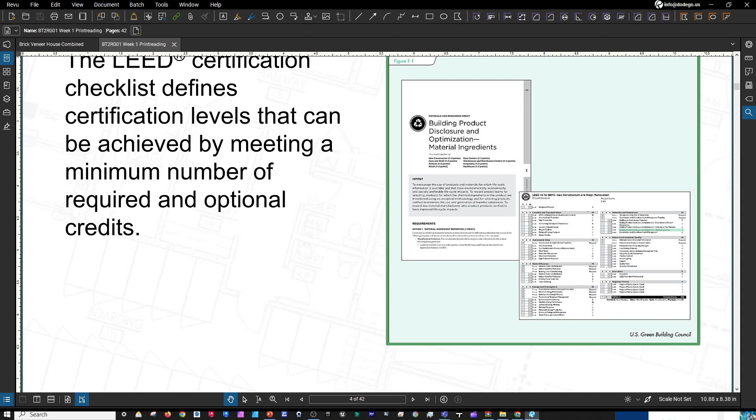Now, speaking more about the prints, while some electrostatic prints are still produced today, as you see, the majority of construction drawings are produced from digital files using wide format LED or laser and inkjet printers. Now, these wide format digital printers sometimes are referred to as plotters, and they use light emitting diodes, or LEDs, as we all know them.

Also, lasers or inkjets to produce those clear and accurate construction documents quickly and cleanly, as opposed to historically, when everything was done by hand on a drafting table.

Now, Jimmy, something to add?

No. So now with the click of a button, you can print off multitudes of sheets in one project quicker, easier, faster. So that's an advantage of these digital prints that we have nowadays. But we may have lost some degree of artistic expression. If anyone's ever seen old architectural drawings, 1800s, 1900s, especially if you go to a museum in Chicago, they still hold a lot of these prints for artistic viewing, and they're simply beautiful. So if you haven't done so, I very much recommend it.

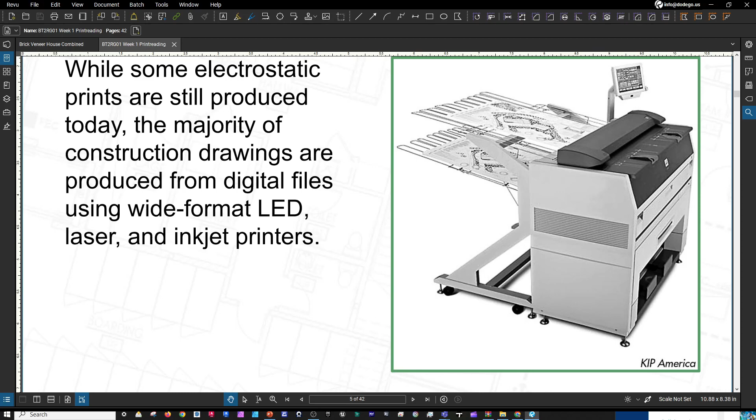But again, our digital frontier is what we're on, and printing LED style prints is very much the thing of the day. Okay. Coupled with that, we have computer aided design. And that computer aided design is also known as CAD, also known as computer aided drafting or computer aided drafting and design. And this utilizes computers to produce architectural drawings.

And CAD systems are common in architectural and engineering firms because of their efficiency and the quality of drawings that are produced. Now, architects benefit from increased drafting productivity achieved in the planning, the design, the drafting, and the reproduction of those prints. And CAD generated prints provide consistent line work, consistent symbol representation, and probably most importantly, consistent lettering.

And you can see that here in this example provided to us by Rodger A. Brooks Architect, showing us a section on the left-hand side, on the top right, an exterior elevation, and at the bottom, a detail. All right. Main takeaway is that CAD generated prints are going to provide consistent line work, consistent symbol representation, and consistent lettering.

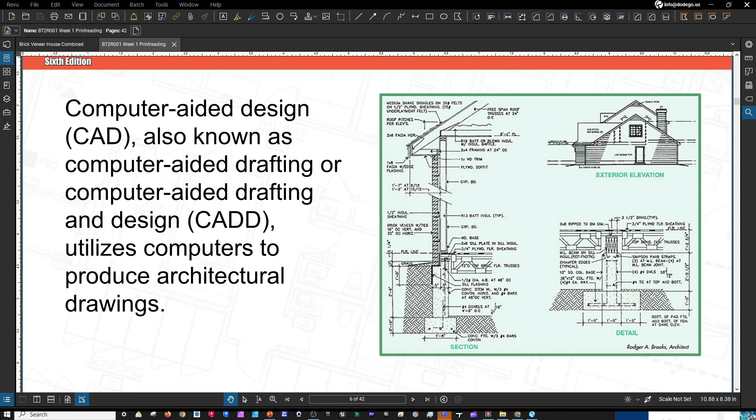Which leads us into a more sophisticated form of CAD: BIM modeling, right? So CAD systems are going to offer many advantages for architects when developing their drawings, including consistency, which I emphasize. And that consistency can encompass uniform line width, symbol depiction, and representation of drawing components. It also includes an advantage of changeability. So revisions or any additions or deletions are easily made to that electronic file.

CAD systems also provide an advantage in layering. That's a method similar to using overlays on conventional drawings, in which trade specific information is added to a base drawing to generate trade specific drawings such as mechanical plans, electrical plans, and plumbing. Another advantage is modeling. So, viewing a building in pictorial form and subjecting that model to engineering tests, such as a stress test, which you will typically see in a structural application, can also be a major advantage.

Another advantage is storage. Drawings stored on electronic media, such as a compact disc or a flash drive, consume less physical storage space than paper drawings. Another advantage is duplication. So you can have an unlimited number of prints, and those may be reproduced, each with original quality. Lastly, another big advantage is information management. Information about the materials used in drawings can be stored and updated as drawings are generated and changed, allowing the drafter to extract that information for takeoff purposes.

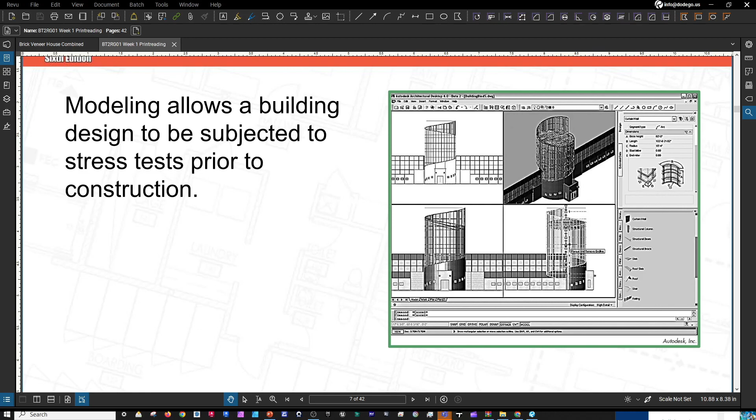More important, what we see now is BIM. And we have an example given to us here by Vico Software Incorporated. BIM, if anyone hasn't heard of it, is short for Building Information Modeling. Building Information Modeling is an integrated electronically managed system that aligns all working drawings, including your structural drawings and your shop drawings, in a consistent system. Building Information Modeling, also known as Virtual Design and Construction or VDC, allows for integration of CAD generated documents or building models from various sources to create a complete set of construction documents.

And contractors, your subcontractors, and your suppliers can all import the electronically produced construction documents or models into a common system that recognizes all of the individual construction components in a fully integrated platform. And now prints are generated from the integrated model that takes all construction components into account. BIM technology also allows for integration of estimating and scheduling software, which are very important on the construction side, very much impacting the economics of any type of architecture. Okay, and that's BIM, short for Building Information Modeling. Any questions before we continue?

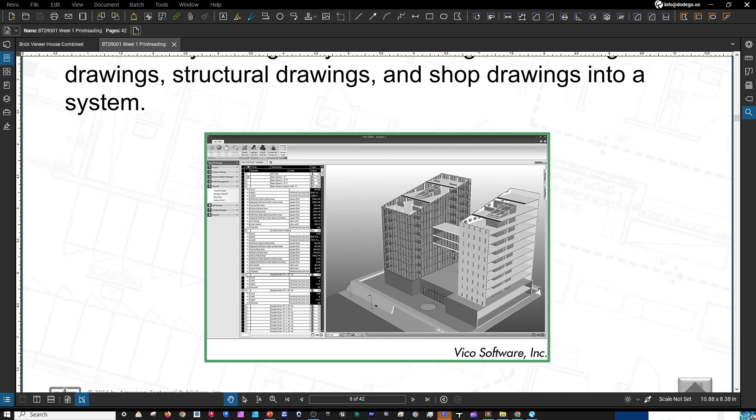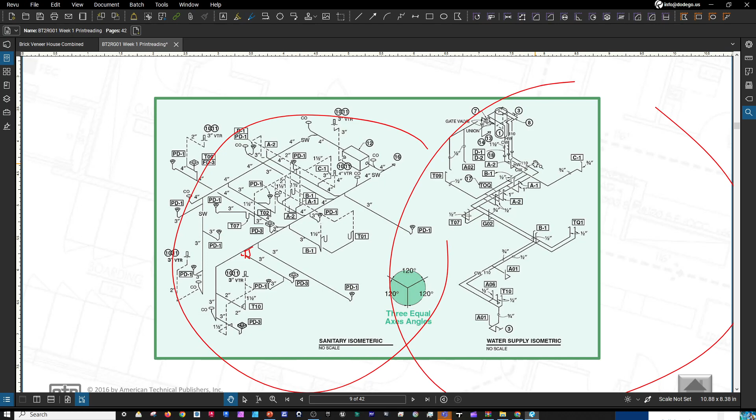Next, isometric drawings. Now, this is going to be a drawing in which you're going to have three principal axes. They're going to be 120 degrees apart. Let me see it here. Three principal axes. Here, all at 120 degrees apart. These are isometric drawings. One dealing with sanitary, one dealing with water supply, but they both are isometric.

So since the principal axes are at an angle, those three principal faces are going to be skewed. However, isometric drawings provide a realistic looking view of the object. And isometric drawings are commonly used for piping diagrams to depict the arrangement of piping in a building. But your main takeaway is that an isometric drawing is an axonometric drawing in which the three principal axes are 120 degrees apart.

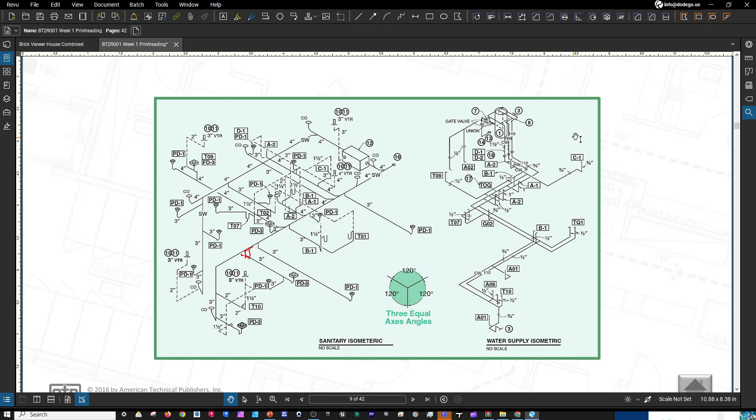Next, perspective drawings. Perspective drawings are the most realistic type of pictorial drawing. A perspective drawing is a pictorial drawing showing an object as it appears when viewed from a given point. They are commonly used as artists' renderings of a proposed building. The rendering allows a potential owner to visualize the overall appearance of the completed building and may be used for presentations to various zoning boards.

These are your money shots. These attract and create appeal to any potential project that is wanting to be built. Okay? Perspective drawings.

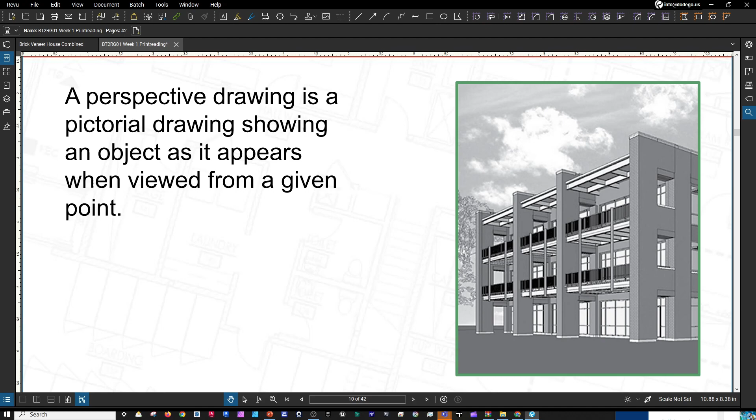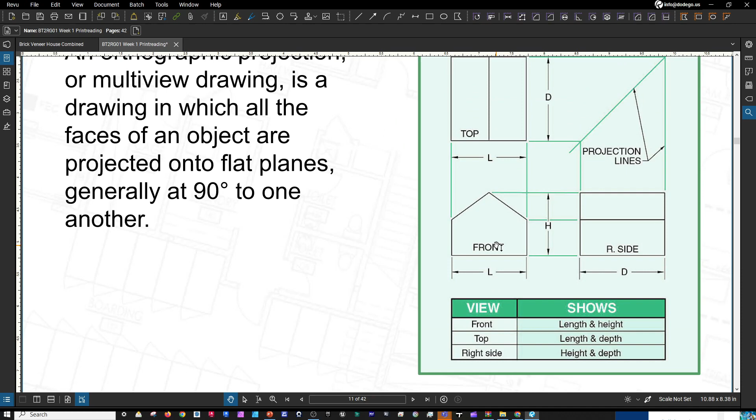Another type of projection is orthographic. An orthographic projection or multi-view drawing is a drawing in which all of the faces of an object are projected onto flat planes, generally at 90 degrees to one another. This is different from what we saw in the isometric, where they're at 120 degrees. The front, the top, and the right side views are most commonly shown.

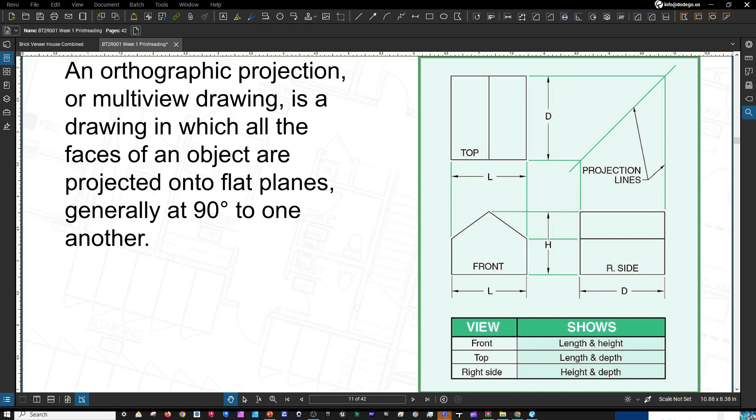The top view is always directly above the front view. And the right side view is always directly to the right of the front view, as you see here. So in orthographic projections, each view is shown two-dimensionally. Here, the front view is showing the length and height of our building. The top view is showing the length and the depth. And the right side is showing our height and our depth. Any questions on these? All right.

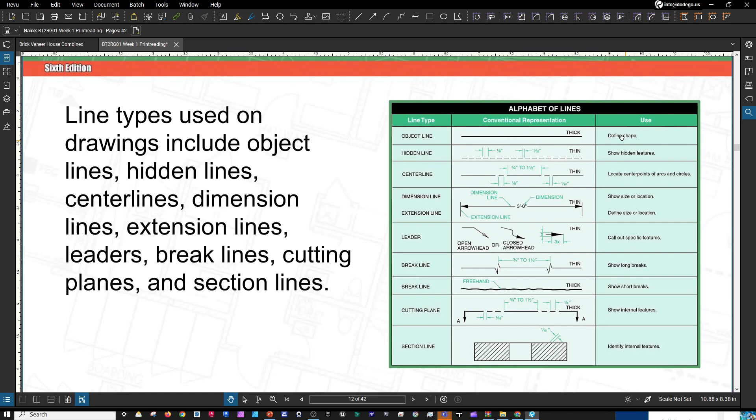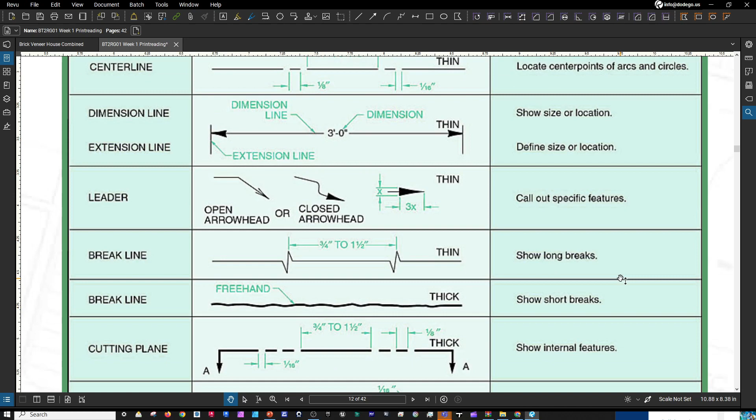Line types. Line types used on drawings include your object lines. We're going to zoom in here. Your object line, hidden lines. We also have center lines, dimension lines, extension lines, leaders, break lines, cutting planes, and section lines.

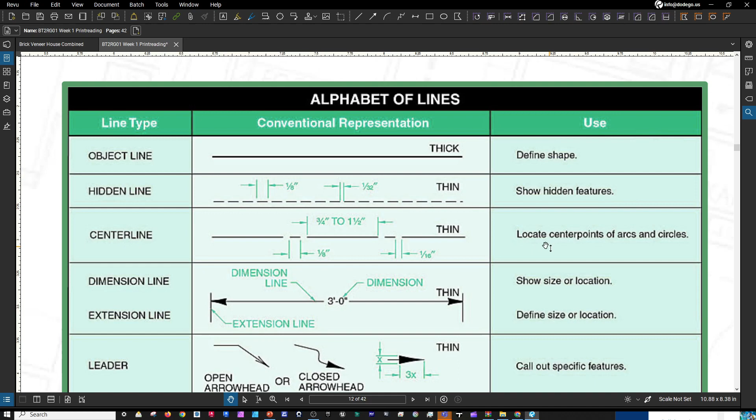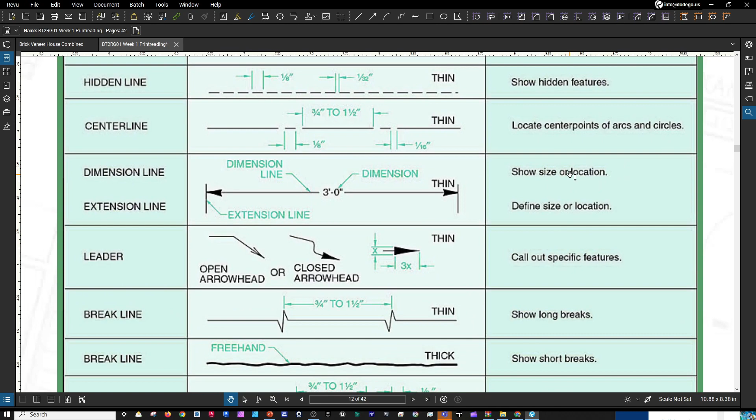Your object line is going to be more thick and heavy in appearance. These are typically used to define the shape of an object. Hidden lines are used to show hidden features, which we'll see heavily used in elevations, sections, or details. Your center line is used to locate the center points of arcs and circles. Dimension lines are used to show size or the location of objects. Your extension lines define the size and also the location, but in a more particular manner.

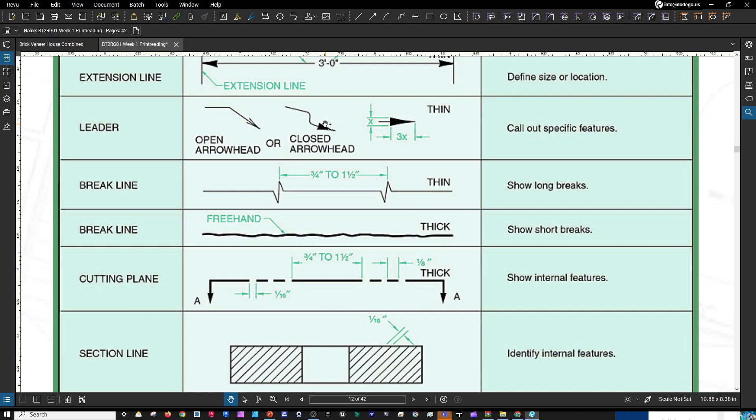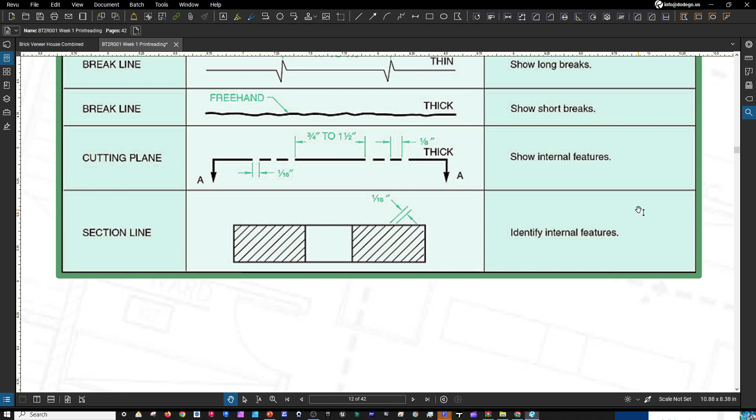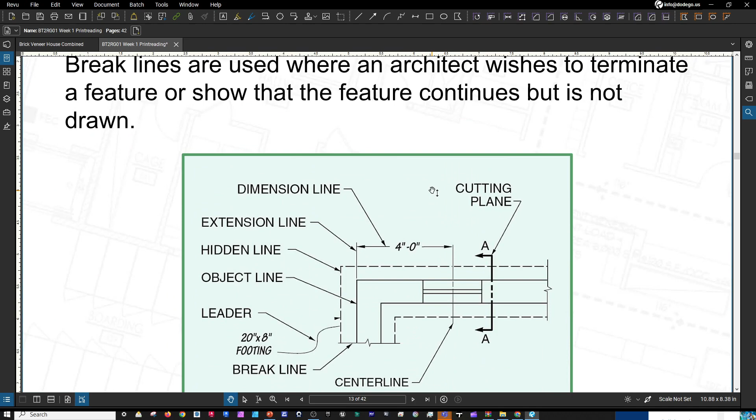As you see here, we have our dimension of 3 feet. Our dimension line is thin, and the vertical part is the extension line. Leaders are used for calling out specific features. Break lines show long breaks, but could also show short breaks. Your cutting planes show internal features of an object. And your section lines are used to identify internal features. Now, dimension lines are terminated by use of extension lines.

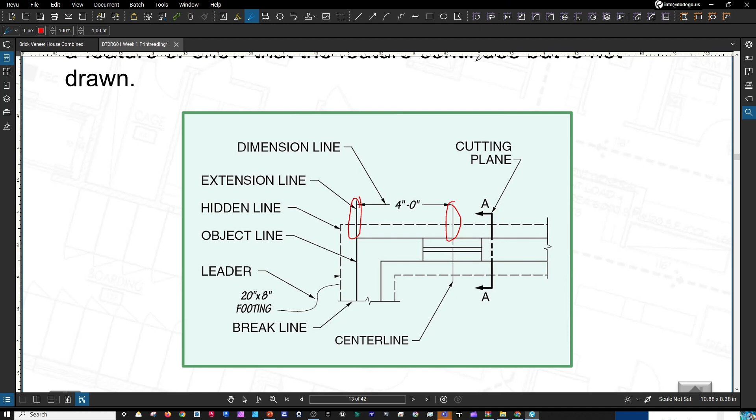Okay. Again, dimension lines are terminated by extension lines projecting from the feature being dimensioned. So here, this is a graphic representation of a window. We're saying with our dimension line, from the edge of this wall to the center line of this window is 4 feet. It should only be 1 tick mark, not 2. 4 feet.

And so you know that dimensions are added above a continuous dimension line or centered along it to determine and show the object's length or item to be called out. Now, those break lines are used where an architect wishes to terminate a feature or show that the feature continues but is not drawn.

Here, we see break lines on the left and on the right. So this portion of the building is the wall, and it continues on down this way and also in this direction. But we're just calling out this section of it. So we understand that this break line is communicating to us that there's more wall and more information about this building, but we're only looking at this particular area of it.

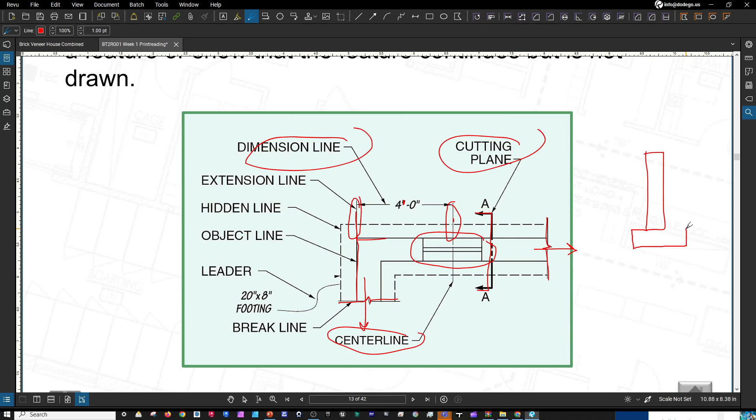This section or cutting plane is cutting through this wall looking to the left. So it'll be something similar to this. As the two wonderful people have mentioned, it's a footer. Some rebar in there. What's around our footer? Ground. So if we're looking at floor plans looking down, it's calling out the edges of this footer to let us know there's more business going on below ground.

Okay. Anyone do not get it? Speak now, forever hold your peace. Okay. Good, good, good.

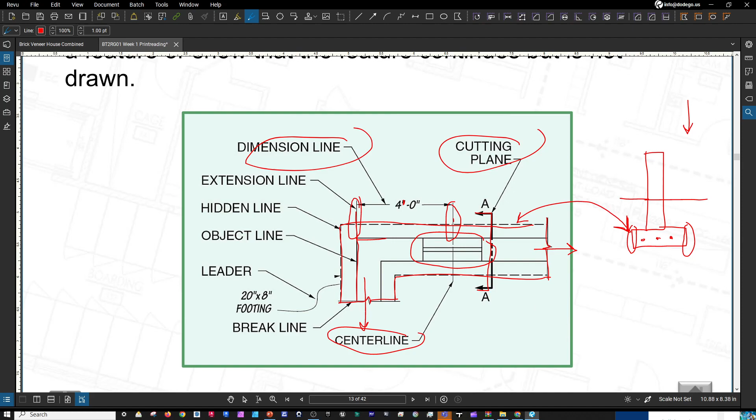Now, scale. Scale is going to be our relative size to which an object is going to be drawn. Again, I mentioned last Tuesday the relevance of real estate on a sheet of paper for drawing or depicting real life objects. The actual door is not going to sit on my 8.5 by 11 sheet of paper, my 11 by 17, my 18 by 24, even my 24 by 36. A door is big, usually a typical size 3 foot by 7 feet, or even 8 feet nowadays.

So I'm going to make use of scale to draw smaller on my sheets of paper, but also communicate to the individuals in the building industry that, hey, this is at this scale. I'm also going to note it. It's supposed to be a certain size, but also you can make use of my scale to determine its actual size.

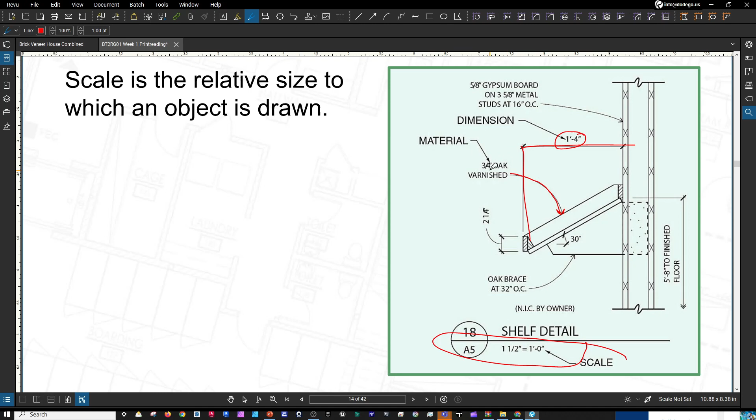So here in this example, we have a shelf detail showing us our dimension with our extension lines and dimension lines, with notes calling out what type of material is being used, which is a 3/4 inch oak varnished. We have degrees being called out, hidden lines being made heavy use of, gyp board, short for gypsum board, on 3 5/8 metal stud, 16 inches on center, which is this area in between, gyp board, break line, break line.

So it's impractical to create working drawings at an actual or even a half size. So working drawings must be created large enough to clearly show all necessary information, but yet must fit the drawing sheet specified for the project, that being probably 24 by 36 or 18 by 24. Okay.

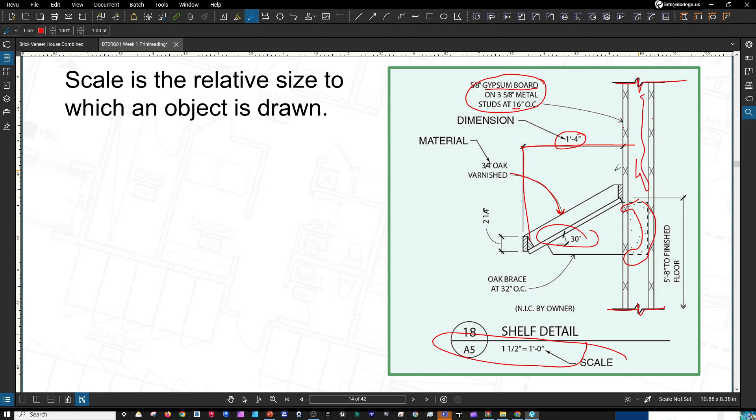Now, an architect scale. So to use an architect scale, you want to place the 0 that we see here, either this one or this one. You have one on the opposite side. I'm going to place that 0 of the appropriate scale on one end of the line and then read the largest increment following on the other end of that line.

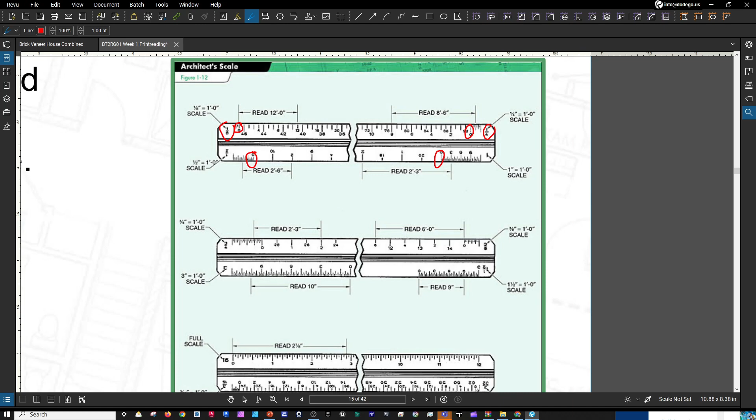Now, inches are read between the 0 designation and the scale size shown near the end of the architect scale. And the various scales can be read from right or left, not both. And scales that are multiples of one another are shown on the same edge just to conserve space. So for example, the 1/8 inch equals 1 foot and the 1/4 inch equals 1 foot scales are located on the same edge. Here's the 1/4 inch, here's the 1/8 inch. The 1/8 inch scale is read from left to right, and the 1/4 inch scale from right to left.

Okay. So if I start at 0, each foot would be 1, 2, 3, 4, 5, 6, 7, 8 feet. And then you can use these to get more detail on inches. Okay. That's your architect scale.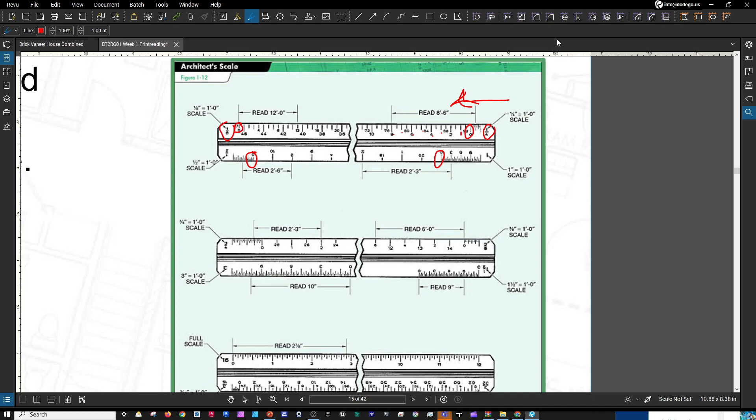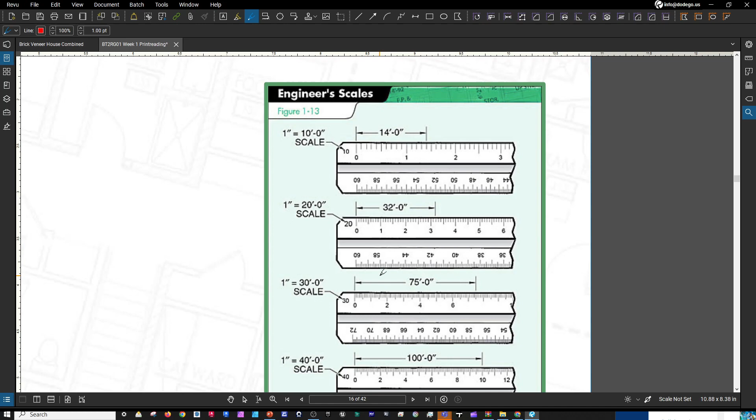Another type of scale is our engineer scale. Our engineering scale is another triangular 6-sided scale used to draw and measure large areas such as your building lots on your plot plans, civil drawings as well. Scales on an engineer scale range from 1 inch equaling 10 feet, 1 inch equaling 20 feet, 1 inch equaling 30 feet, 40 feet, 50, and all the way up to 60. So since engineer scales are used for drawing and measuring large areas, the inch divisions of a foot on an engineer scale are omitted.

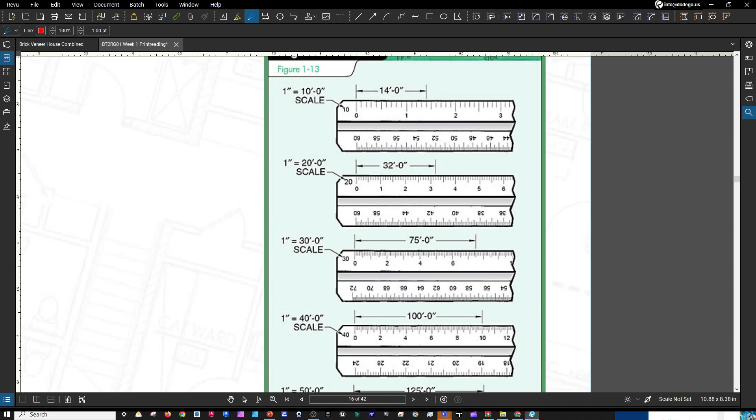Now, dimensions are going to be shown to locate points from other points on the print, and those extension lines again extend from a surface or other point of reference. And those dimension lines terminate or end on the extension lines and are generally continuous lines with dimensions appearing above each of those lines. Now, a dimension may also be centered in a break line within that dimension line. And our arrowheads, our slashes, and our dots are going to be used as dimension line terminators.

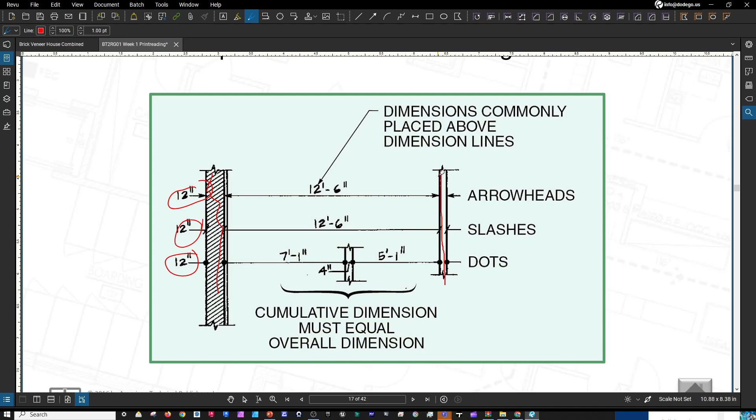In this example, we have a wall to the left, which is being called out as being 12 inches thick. All this area in between. And then from that point to, let's say, this rail here is going to be 12 feet 6 inches. It could terminate as an arrow, a tick mark, or a dot. That dimension in between can vary. You can use 7'1" from here to there.

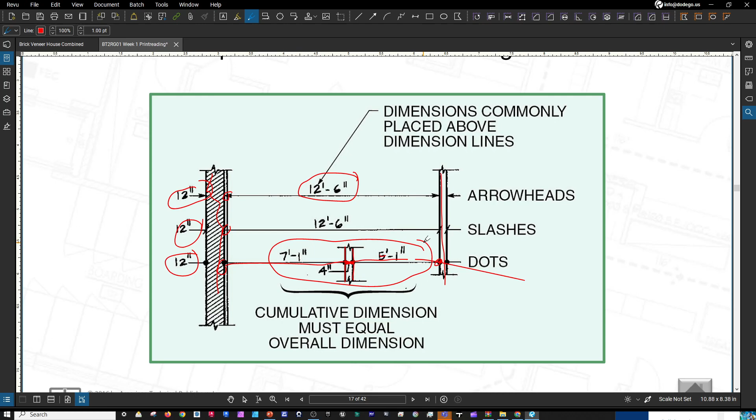It stops. This is going to be 4 inches wide. Continue on from that last dimension, and then continue to your termination area of 5 feet 1 inch. Add it all together, and it will give you 12 feet 6 inches. That's that cumulative dimension, and it must equal our overall dimension. Cumulative, overall.

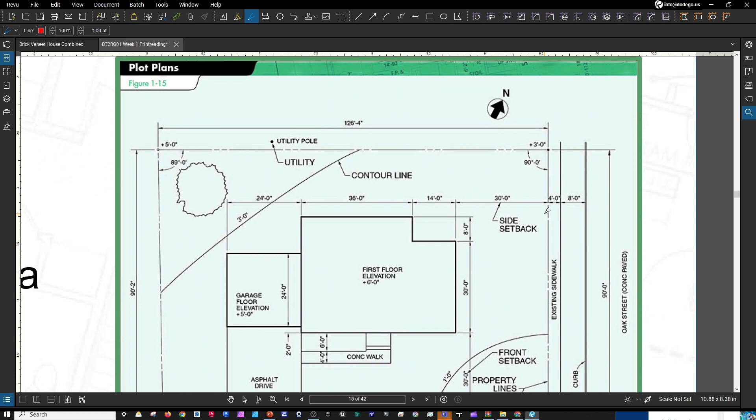Now, here's an example of a plot plan. You'll see this on our first example of our single family home called the brick veneer house. It will have a plot plan. And that plot plan is basically a scale working drawing that's going to show the shape and the size of a building lot. So it's going to show the location, the shape, and the overall size of a building on that lot, and the finished floor elevation of the building.

Now, other information such as your setbacks may also be included on a plot plan as required by your AHJ, or authority having jurisdiction, or a local ordinance. Since we're here in Tampa, you might have City of Tampa or Hillsborough County, or whatever county or city you live in. Those will be the end-all, be-all authorities issuing inspections and permits.

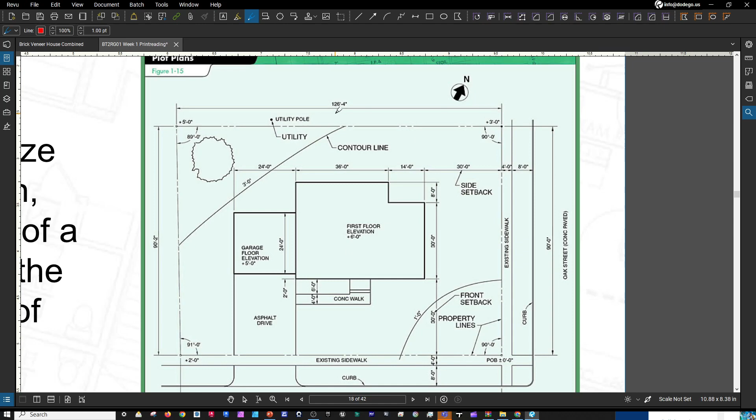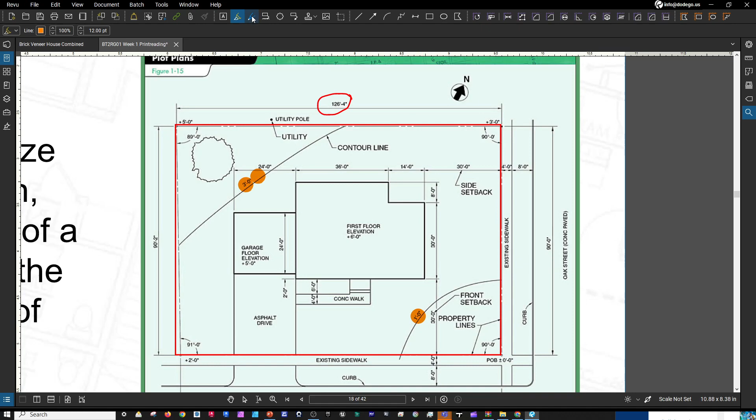So in the example of this plot plan, we have a lot that is 126 feet and 4 inches wide by 90 feet and 2 inches. That will be your property line. All in red is your property line. You have contour lines on site indicating slope. So they're saying this contour line is at 3 feet. This contour line is at 1 foot. So it's sloping up this way, or sloping down, depending on how you want to see it.

We also have vegetation or trees. We have a utility pole. On the public side, we have existing sidewalk. And that sidewalk is 4 feet wide. We have a little green space of 8 feet where grass will be. And our street curb. Our building on our lot that we want to sell or buy,

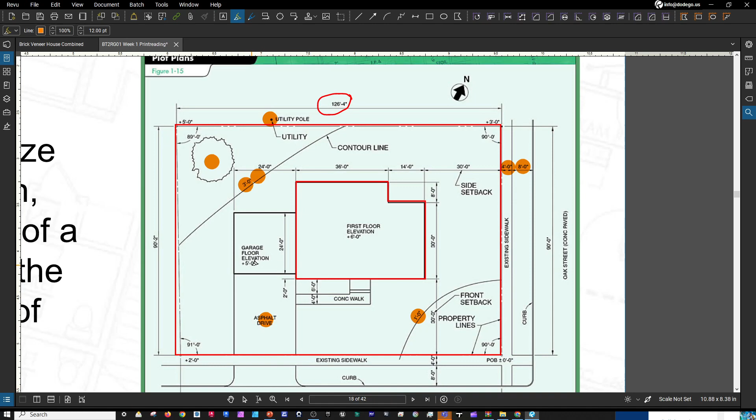we have 36 feet here, 8 feet, 14 feet, 30, cumulative of 36 and 14 being 50. And we go up to 38 feet. That is our building. And it's calling out that our first floor elevation is going to be plus 6 feet above the ground. We have an asphalt driveway coming into our lot. We have a garage and its elevation is plus 5 feet. So we have a foot difference between the two. So I can go into here from my garage or walk out to go to the front door.

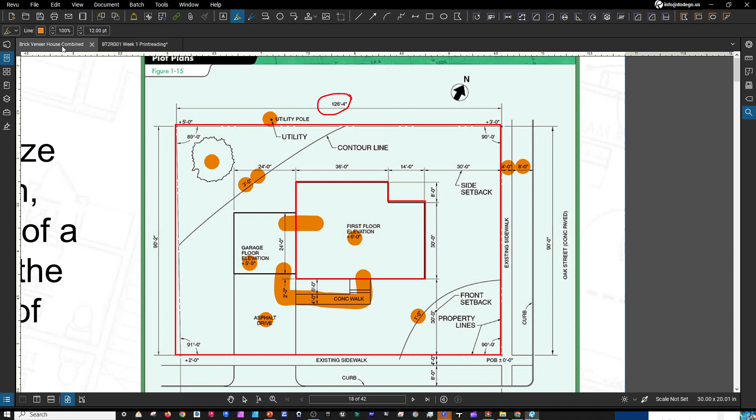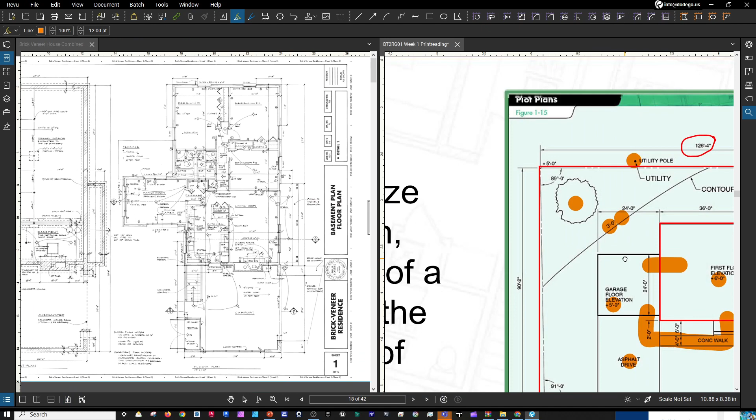So we have a concrete walk that is 4 feet wide, 6 feet back from the front of the building and entering into our space through the front door. To get a peek of what that looks like in plan, these are the plans for the brick veneer house. We'll do a side by side. Again, we're not getting heavy into the actual brick veneer plans, but to give you an idea of how diagrammatic this plot plan is, it will show. Let's rotate it.

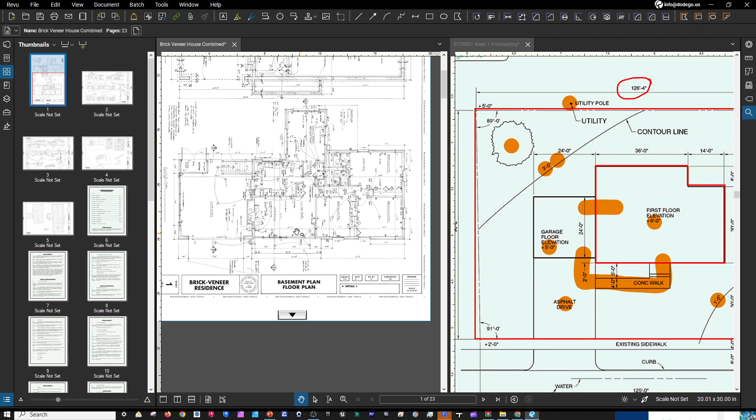Here is that carport or garage, our main living area, sidewalk, walk through the front door.

Yes. Can you explain how the property line is identified? Since most blueprints aren't in color, right? Correct.

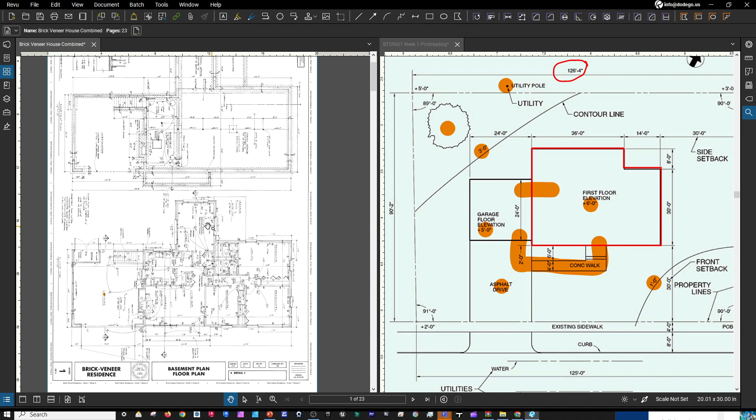So is the property line shown in the image on the left? No. So typically when you start getting a set of documents, you'll have drawings before you get into the floor plans itself, which will be a more blown up view, or your site plan or your plot plans. Right? Your plot plan will look more something like this, providing you how far those setbacks are. So for example, the one on the right, it is giving us our setback here of 30 feet on the side setback, and the front setback being 30 feet.

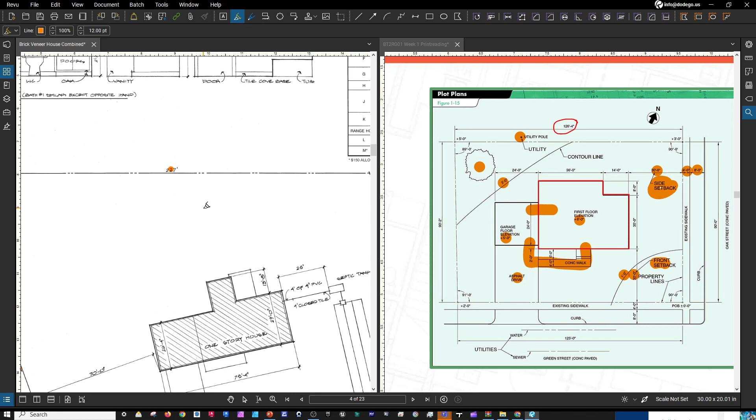And then usually you'll get a rear setback. And those property lines are being denoted by what type of line it is. So we have a long line followed by two smaller dashes, then a long one, then it repeats. Also, another way to depict a plot plan is to look like this, like we see here. Again, those line types, and then you'll have your dimension of each segment of that line. With this being a curve, it goes along with this particular front yard property line.

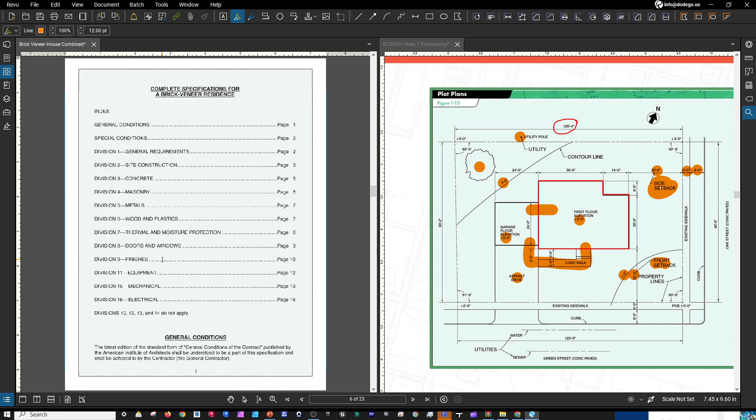Did I kind of hit the question or get away from it? Yeah. So the property line is defined by the setbacks? The property line is not necessarily defined by the setbacks. The property line is really defined by whoever's developing that lot in the city where it's being built. So, for example, I'm a developer. I go into Tampa and I buy a 100-acre lot, and it's zoned for whatever it is.

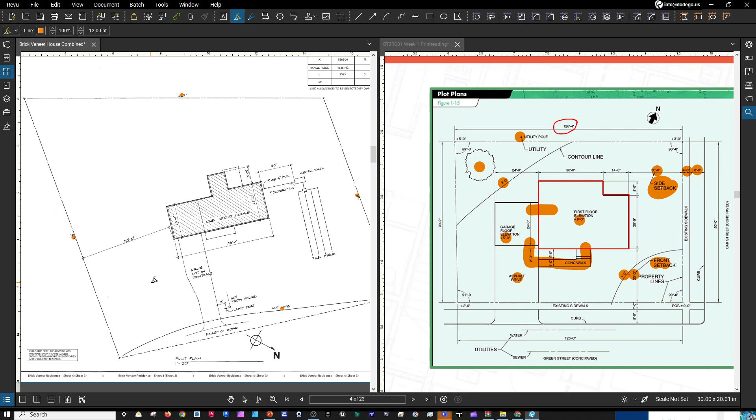Not the plot line? The property line. Correct. The plot line or the property line, you could say either or in this case. Okay. Did we mention what kind of line that was? The long line with the two dashes in it. Yeah, that's going to be your property line or your plot line. Just say it's your property line, you'll be good. So here, zoom in. Your property lines.

Okay. Gotcha. Thank you. Got it. You're welcome. Any other questions? Okay.

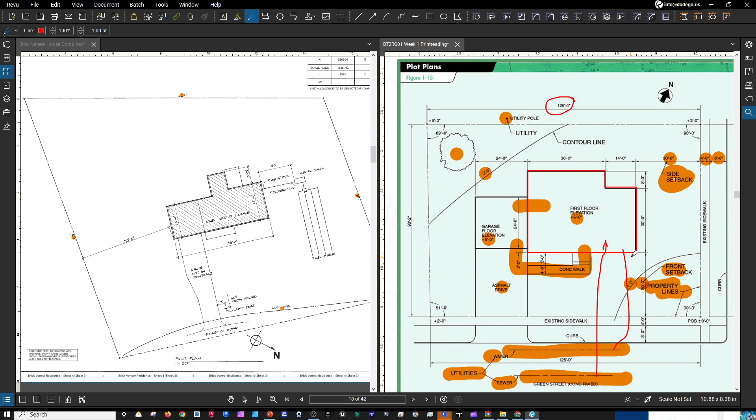A probably important aspect of your site plans or your plot plans is where your water and sewer lines are located. Usually they're going to be in the public right of ways. Why that is important is because you want to know where exactly you want to tie in to those objects to bring it inside your building, because you need water and sewer in your building unless you have your on-site generation of your own water or your own septic tank. Okay.

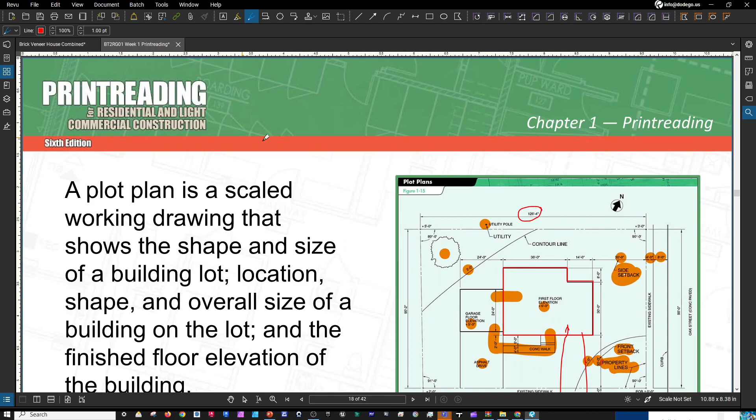Now, our floor plan is nothing but a plan view of a building that shows the arrangement of your walls and partitions as they appear in an imaginary horizontal section taken approximately 5 feet above the floor level. In some cases, 4 feet, you may hear. But floor plans are views of a building as though a cutting plane or cutting planes were made through it horizontally. So a one-story building requires one floor plan. And buildings with more than one story generally require a floor plan for each of those levels. And floor plans are considered to be one of the most used working drawings in a set of prints.

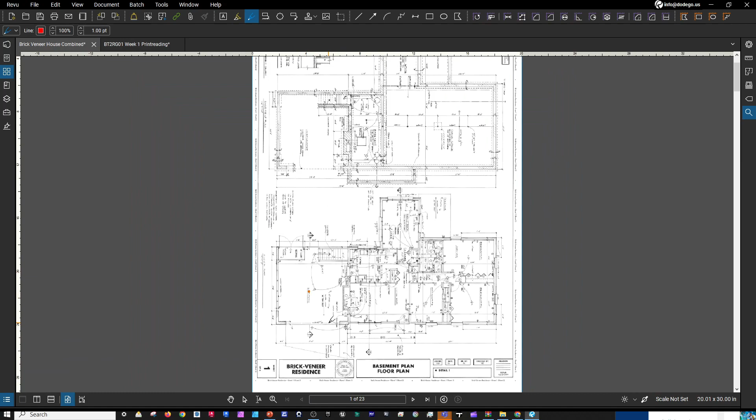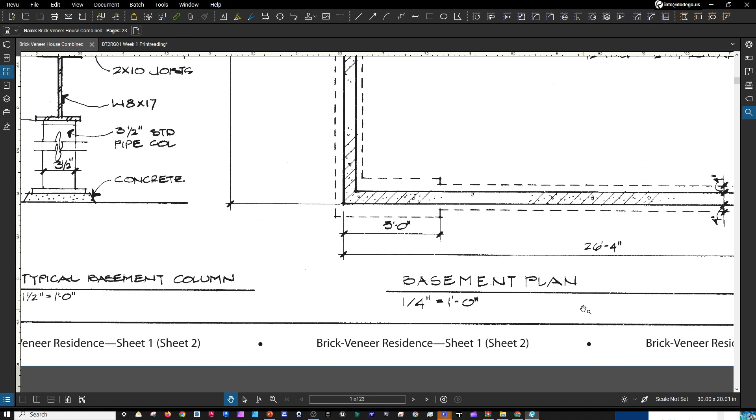Referencing back to your first set that you'll see, we have two plans shown on the first sheet. It will be our floor plan shown at 1/4 inch. Let's rotate that back. Floor plan at 1/4 inch scale, and also a basement plan at 1/4 inch scale. And your floor plans are considered to be one of the most used drawings again in any set of prints. Your floor plans. Okay.

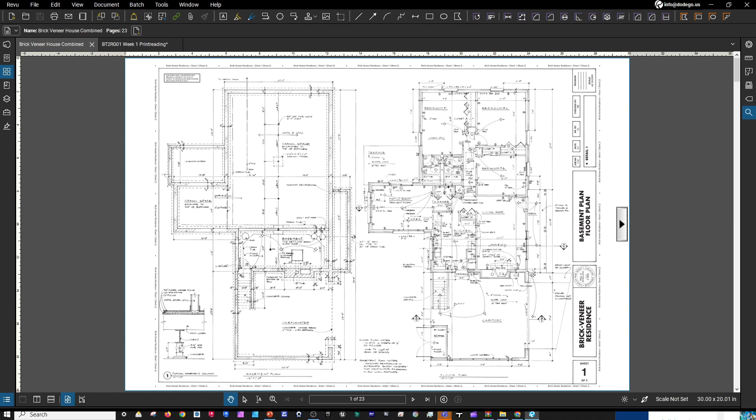Now elevations. Elevations are nothing but a scale view looking directly at a vertical surface. Now, depending on the building size, the building shape and complexity, four or more elevations may be required to clearly show the exterior walls. Generally, however, four exterior elevations are sufficient. You have the front, the rear, the right side, and the left side, or even the north, south, east, and west, depending on how they want to depict or notate those elevated sides.

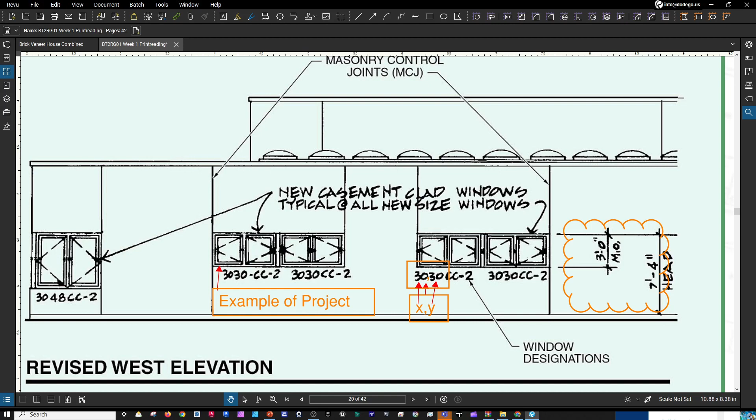And the north elevation of a building is going to be the elevation facing north, not the direction a person faces to see that side of the building. Again, the north elevation of a building is the elevation facing north, not the direction a person faces to see the side of that building. And elevations are going to be identified and the scale will be provided. Okay.

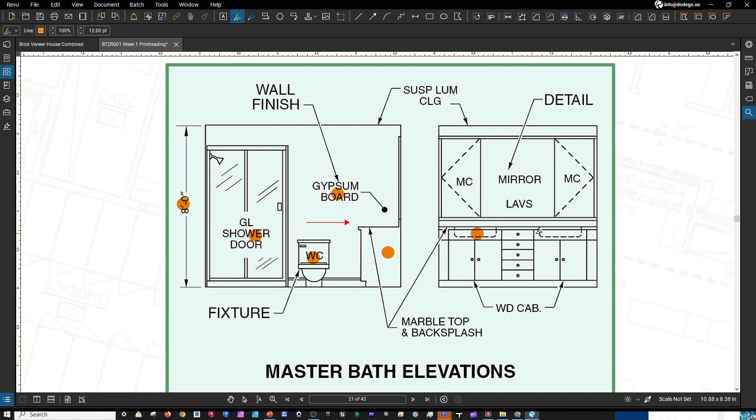We have a water closet, and that's going to be installed between the shower and the vanity. And the shower has a glass door, and the vanity has two lavatories separated by an all-drawer unit. The countertop and the backsplash are going to be marble. And we have medicine cabinets on each side of the mirror, and they're going to be hinged along the outside. Medicine cabinet, and that's called out. The hinge means it's going to swing out this way. Major takeaway is that interior elevations are nothing but orthographic projections of interior walls and partitions.